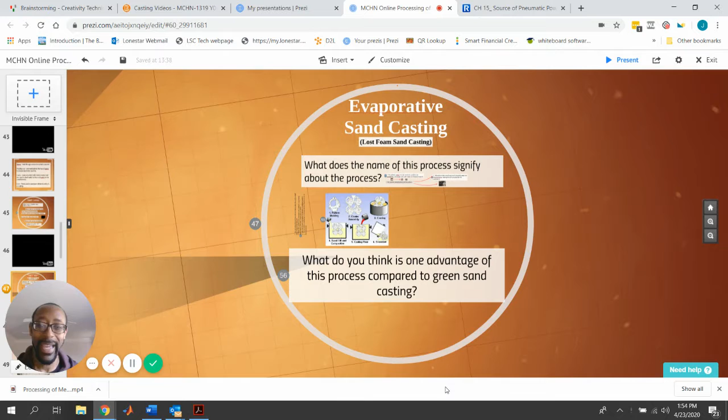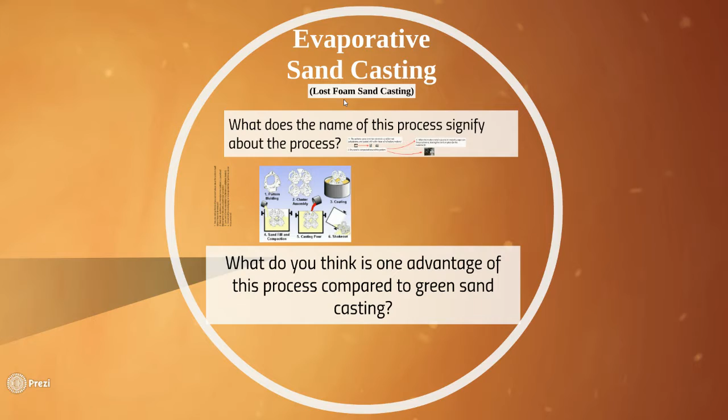We're going to move on to evaporative sand casting. Another name for evaporative sand casting is lost foam sand casting, and the reason why it's called that is because you use materials that are essentially foam and then they disappear.

So this is the way it starts out. You have a pattern. The sprue and the riser are all made up of a type of polystyrene, similar to styrofoam, formed from pellets into the pattern, and it's coated with a thin layer of refractory material, sometimes called a slurry or some type of ceramic material. This material is refractory, meaning it helps hold up against very high temperatures.

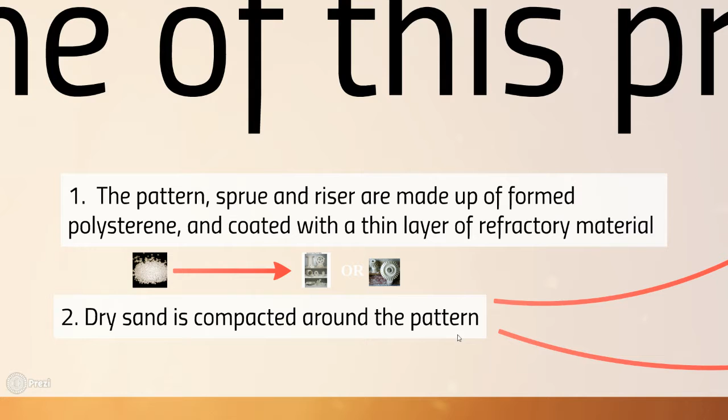The next step is that you pack dry sand around that pattern. So there are the polystyrene pellets that are formed into the pattern.

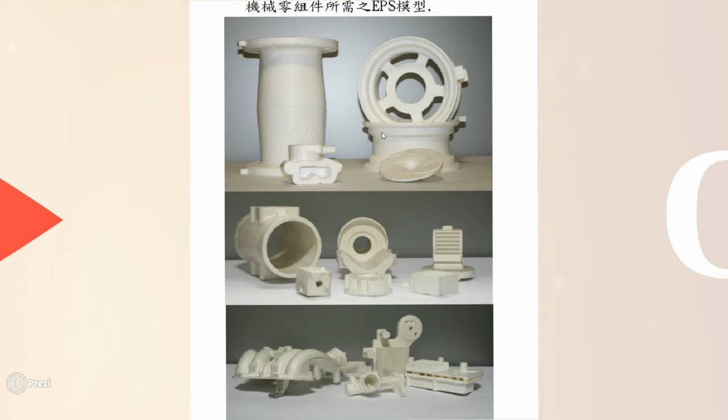Here you can see some examples of common products. It looks like a wheel rim. This is an impeller, like I told you before, from a pump. And then you have another manifold, possibly from a car. Here are examples maybe of gears, patterns for gears.

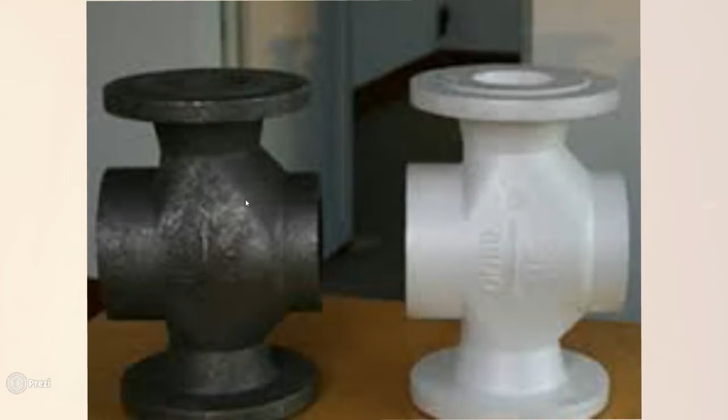What happens next is that molten metal is poured in, and the polystyrene pattern instantly vaporizes, instantly turns into a gas, and that leaves a cavity in place, which is what the metal fills. So you can see how closely the pattern represents the final product.

Here's another diagram of the basic process of evaporative sand casting or lost foam sand casting. You start with a pattern, and oftentimes in very high throughput processing you have what's called a cluster assembly, or tree assembly, in which several patterns are all put together in one group. Then you coat it with the refractory material, and you put it in a box and support it with sand.

The next thing you do is you pour in your molten metal, and as the molten metal hits that polystyrene pattern, it instantly disappears, or volatilizes, turns into gas, and then your molten metal cools into the area that's left over.

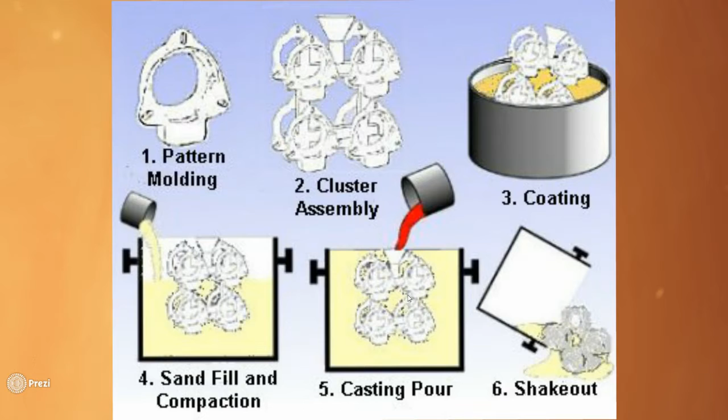So what do you think is one advantage this process has compared to green sand casting? Keep in mind that in this case, you don't have to remove the pattern because the pattern disappears, it volatilizes. So what does that mean?

Well, first of all, you can cast patterns of any different size and shape, because the pattern doesn't have to be removed, so you don't have to worry about a draft. You don't have to worry about how you're going to get this pattern out of the mold, because it instantly volatilizes. Now, mold shift problems, which are a big problem in sand casting, particularly green sand casting, are eliminated because mold shift occurs when you're removing the pattern or putting the pattern in. This doesn't have to happen anymore, so you don't have to worry about mold shift.

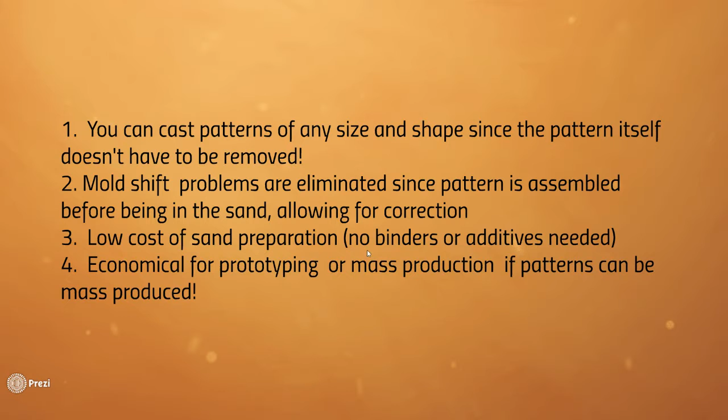It's very low cost to prepare the sand. You don't need any binders or additives. And this is economical for prototyping or for mass production.

Our next type of casting process is called shell process sand casting. This process is actually interesting because it can be considered a semi-permanent mold casting process. So what happens? Well, a permanent metal pattern is used and it's heated.

That pattern is coated with a release agent to make sure that any sand that dumps on it can actually be released from it. Then you turn it upside down in this big box and allow that sand to fall on it, and then that sand sticks to it and hardens.

After a certain amount of time, the dump box is turned back over again, and then the layer that has formed to the pattern comes off, and it looks like a shell. So you have essentially half a shell.

So you do that one more time. You put the two halves together, and then you have a whole shell. You put that in a box with some sand around supporting it, and then pour your metal down in between the two. So this is kind of what it looks like.

Here's a diagram. You have your big dump box, okay? You have your sand at the bottom. Now here's your metal pattern right here. You invert the dump box, turn it upside down, and then all that sand falls on the heated metal pattern.

Because the metal pattern is heated, it starts to solidify the sand in a small layer right here. You turn the dump box over again, and you still have that layer of sand, that shell. Then you remove the shell, create another shell, and you have two halves, and then you support that with sand, and pour your molten metal in between here and allow it to solidify.

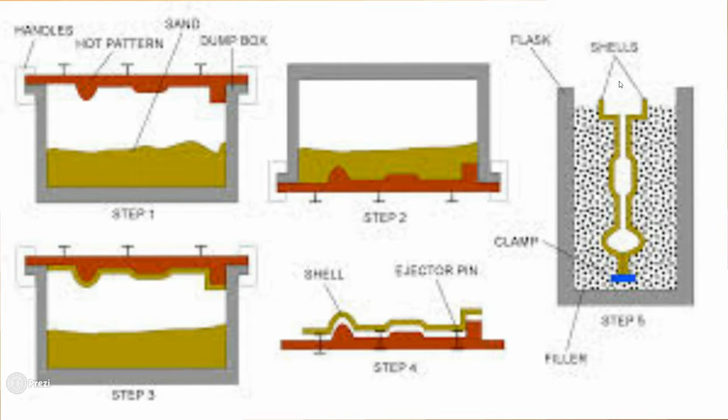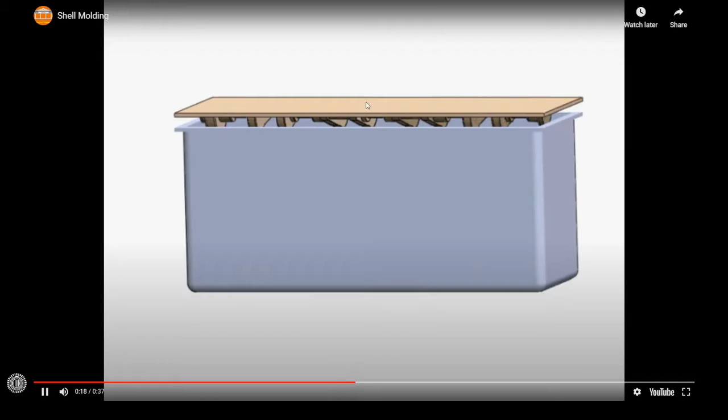So here's a quick illustration of the shell molding process, shell process casting. It's called shell molding or shell process casting. So you see the dump box turned back over again. Here's the metal pattern. Here's the shell that was created. Okay, so now you have two of those shells, and you dump the sand behind it, and then you pour the molten metal in there.

Now, the only thing that is wrong about this is that it looks like you just completely get rid of the shell, which does not happen. It doesn't show you the shell here, but that is what happens. The shell continues to stay around.

Now here is another video discussing shell process sand casting. Let me start that one over again.

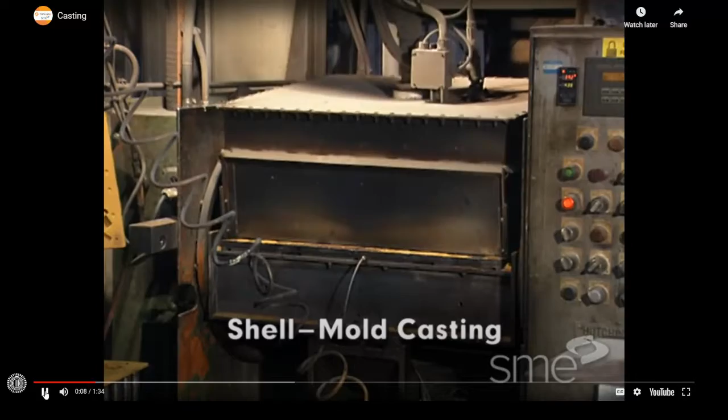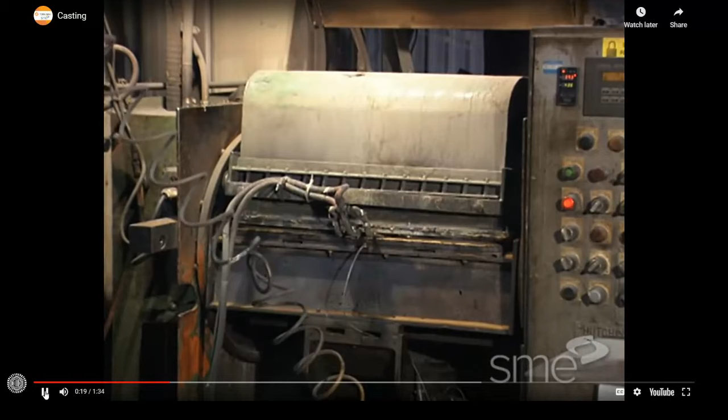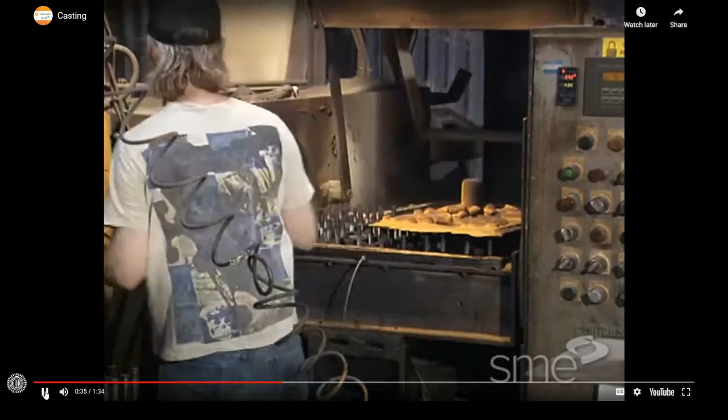Shell molds for sand casting are produced by heating a metal pattern and then rotating it upside down. This exposes the pattern to a mixture of fine silica sand and a resin binder, setting a layer of the mixture to the heated surface of the pattern. To complete the curing process, the coated pattern is covered and baked. Once cured, the hardened shells are removed from the pattern and serve as mold halves.

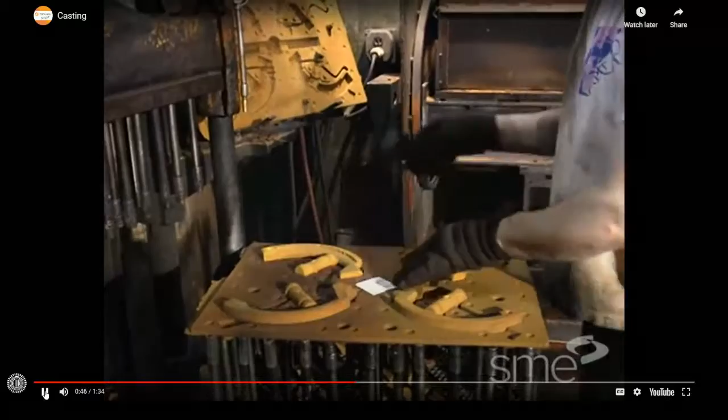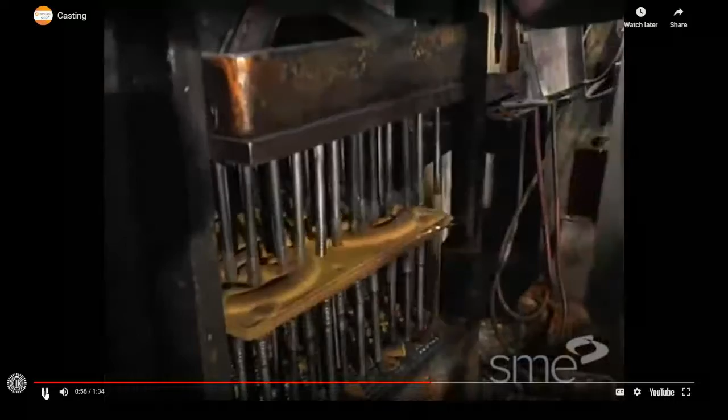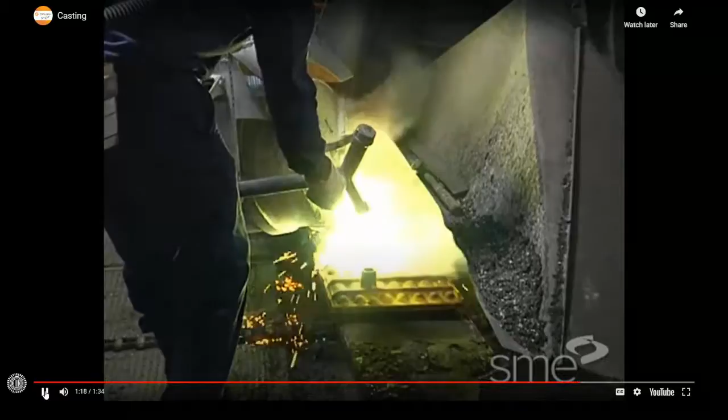Shell cores, which are produced similarly, are placed within the drag side of the mold. A bonding adhesive is then applied, and the cope side of the mold is aligned and secured, creating the finished shell mold. These shell molds can be produced quickly and store well for extended periods of time. Shell mold casting is a semi-precision process, permitting more intricate shapes, closer tolerances, and smoother finishes than using green or no-bake molds. The size of parts that can be cast in shell molds is limited, however, with most castings weighing less than 45 kilograms.

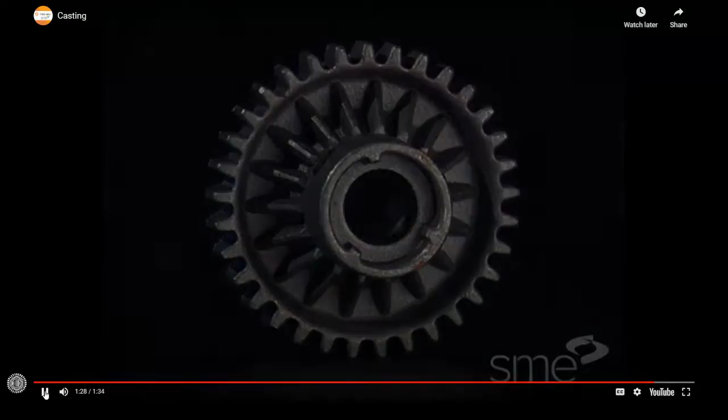All right, so what are the advantages and disadvantages of the shell process casting process? Well, this process has advantages in that it gives you finer detail and a smoother finish. And the reason why it does that is because the sand is finer, and it also makes a smoother mold surface.

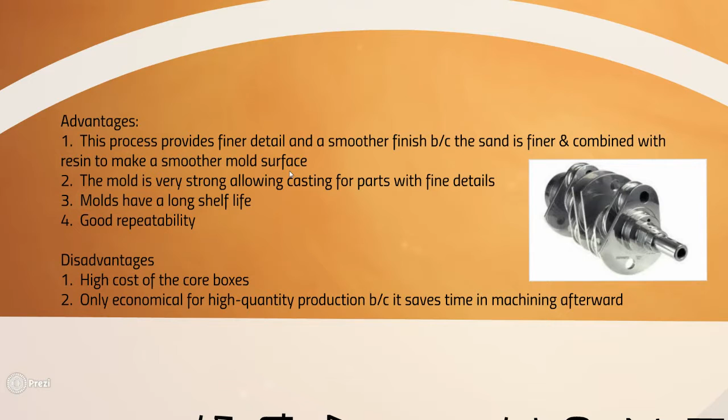Now, part of that is also because you have a semi-permanent mold. So semi-permanent molds and even permanent molds, the more permanent it is, will give you a finer, smoother surface with higher dimensional accuracy. Now, number two, the mold is very strong, okay, allowing the casting of parts with fine details. The molds have a long shelf life. That's why it's semi-permanent. It isn't just one use.

And then it also gives you good repeatability. So you're able to repeat products of the same dimensions with this process.

Now, what are the disadvantages? Mainly that it costs a lot. Okay, these core boxes or dump boxes cost quite a bit. And because of that cost, purely because of that cost, these are only economical for high quantity production.

Also, you have a little bit of savings on machining afterwards because of its superior material properties - it's finer and has higher dimensional accuracy. But in the end, it has a very high cost, which only makes it economical for high quantity production.

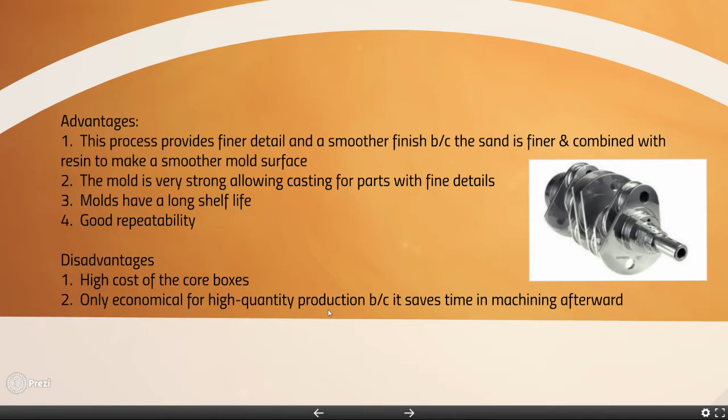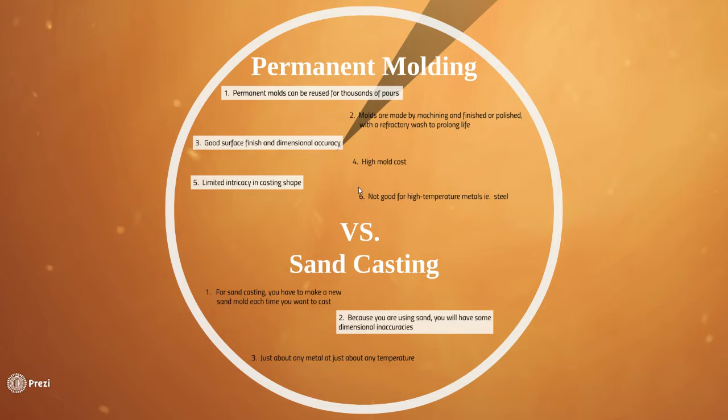All right, now let's look a little bit closer at permanent molding versus non-permanent molding, which we'll call sand casting. And of course, you have the shell process kind of in the middle because that is a semi-permanent molding casting process.

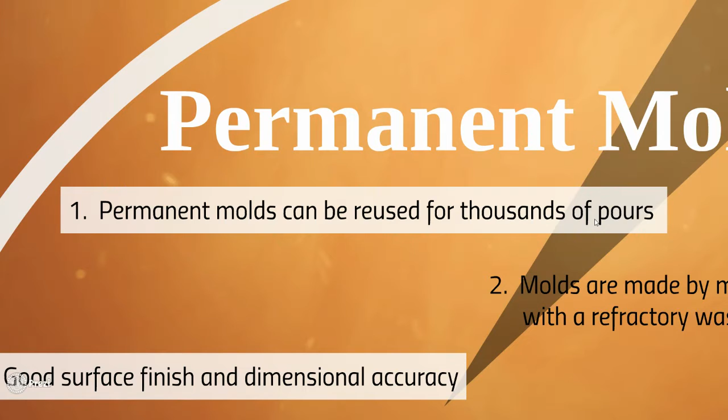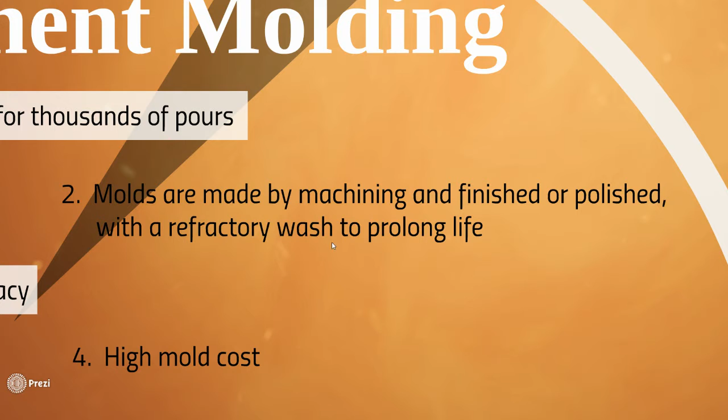So first, how can we describe permanent molding? Permanent molds can be used and reused and reused, so that is an advantage. But these molds are made by machining, they're finished and polished, and then they have refractory typically added to prolong life. We haven't talked about specific permanent molding casting processes yet, but we will directly after this. They also give a good surface finish and very high dimensional accuracy because it is a permanent mold.

All right, let's look at number four. Because it is a permanent mold, it has a very high mold cost. You can remember from part one that green sand casting was very cheap. Well, permanent molds have a very high cost to make and very high cost to maintain.

Also, you can have limited intricacy in casting shape for permanent molds because they're based upon the shape of the mold you can make. They're also not good for high temperature metals. Why? Because the heat from high melting temperature metals can damage the permanent mold, and once it's damaged, you have to create another one.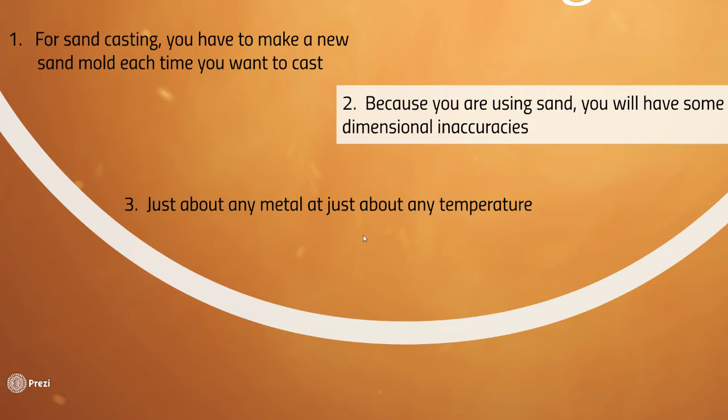For number three, just about any metal at just about any temperature - that's definitely an advantage because of the refractory properties of sand. The melting temperature of the metal doesn't really matter that much, it's not going to hurt the sand. That's why you can cast any metal at just about any temperature.

Okay, so our first permanent mold casting process is called centrifugal casting. Here's how it works: molten metal is poured into a rapidly revolving mold. Obviously this is going to be for molds that are cylindrical or circular in shape because it's rapidly revolving. Then, due to centrifugal forces, the metal is going to conform to the shape of the mold.

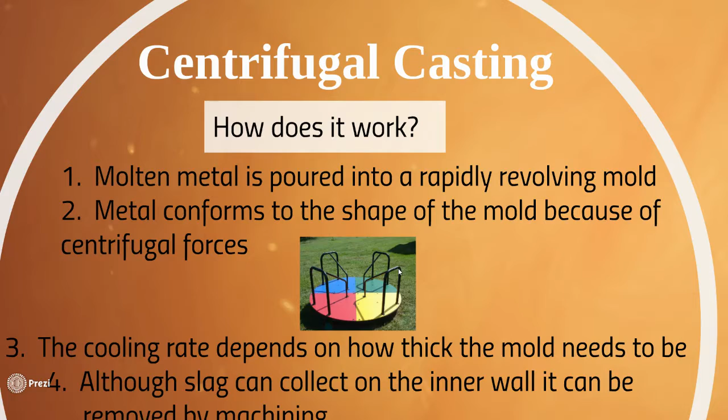Think of something like a merry-go-round. Someone stands in the middle, someone stands on the side, and they go ahead and swing you around. As this thing keeps spinning faster and faster, you can feel yourself being kind of pulled off of it. That centrifugal force is pulling you off of it, and the same thing occurs in centrifugal casting.

Other things to think about: your cooling rate depends on how thick the mold needs to be, so both of those are intertwined. Slag, which is a certain amount of impurities, can collect on the inner wall and be removed by machining. This is actually an advantage because all those impurities can be removed at once, giving you a very pure casting. This can be done horizontally or vertically, whether you want to produce wheels, drums, barrels, or pipes - of course, all cylindrical or circular products.

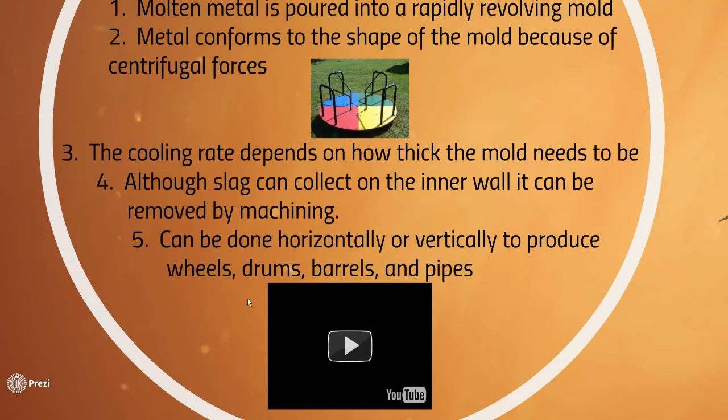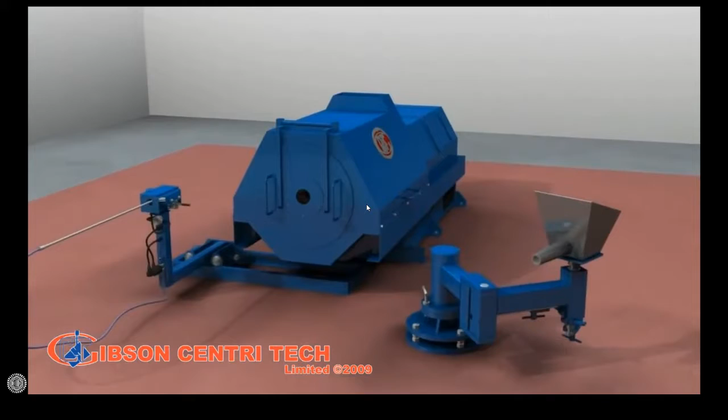So here's an illustration of how centrifugal casting occurs. Right here is the machine that's holding your permanent mold.

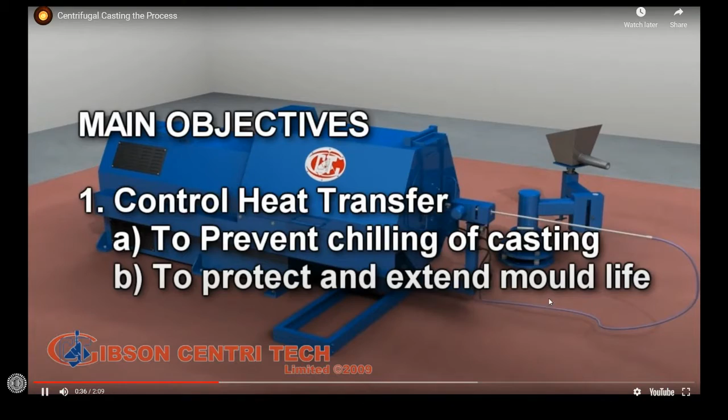Then they're going to do some things first: apply a mold coating to the inside surface of the mold. You can see it's spelled M-O-U-L-D, so it's probably a European video. The reason they're doing this is to prevent chilling and also to make sure that the mold solidifies evenly.

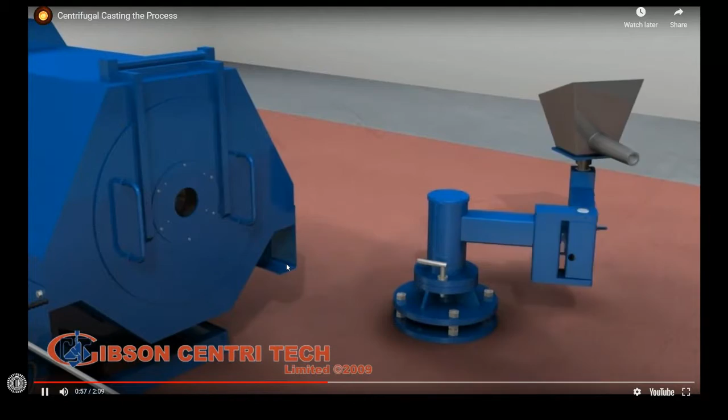Now you also want to provide a good surface finish, and this enables easy extraction of the mold. Next, you're going to pour in that liquid metal, the molten metal.

Metal goes in as your mold is spinning. So the molten metal is subjected to 80 to 120 times the force of gravity. That's the centrifugal force we are talking about.

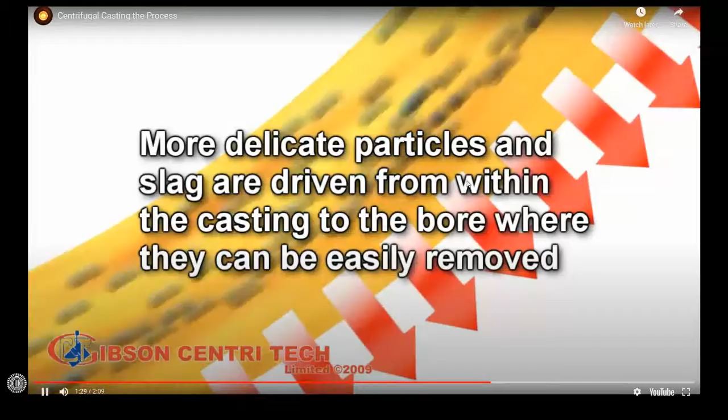Solidification takes place from the outer wall to the inner wall. Because of that centrifugal process, the heavier or more dense materials go to the outside - that's the metal. The less dense material is the slag.

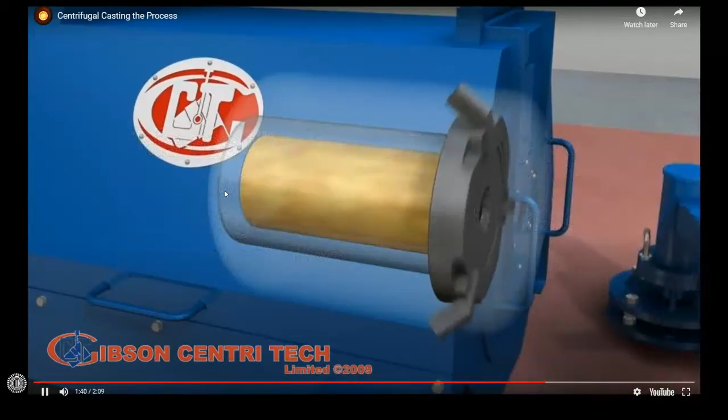So you machine that off, and this gives you a very pure metal structure. The advantage is a very pure structure, which gives you better mechanical properties. You don't have to machine off any ingates or feeders or anything like that.

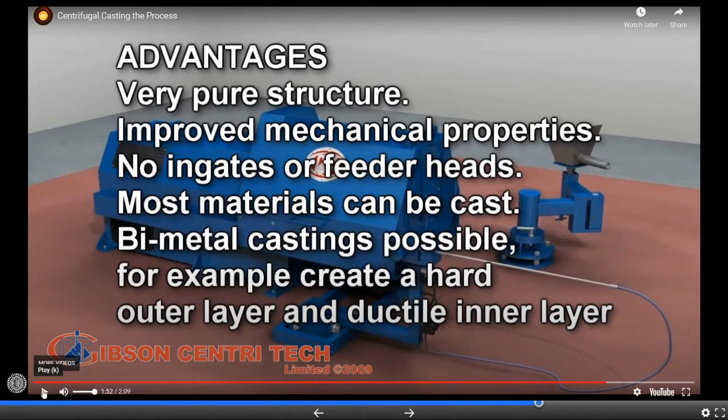Plus, you can do bimetal castings by having one metal that is less dense than the other metal. Applications of this would be if you want a hard outer layer and a more ductile inner layer - a layer with a little bit more flexibility. Now, our next process is called investment casting.

Investment casting is a little unique from some of the other casting processes we're talking about so far. It is not a permanent mold casting process, but the reason we talk about it in this section is because it gives you the high dimensional accuracy and other properties that a permanent mold will give you.

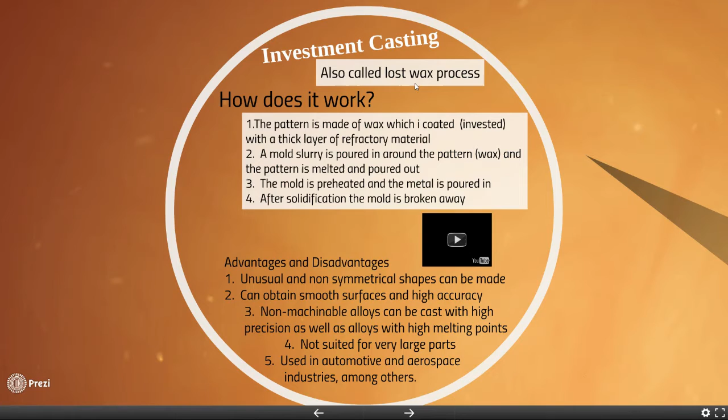This is also called the lost wax process. Remember we had evaporative casting called the lost foam process. So obviously what will happen in this case is that you'll be using wax and then the wax is going to go away. So exactly how does it work?

Well, you initially have a pattern that is made of wax, and that is typically done by a die casting process - so plastic injection molding, which is a die casting process. And then you coat it or invest it. That's why it's called investment casting, because that coating process is called investing.

You coat it or invest it with a thick layer of refractory material. Remember that refractory material is material that protects it from very, very high temperatures, usually a kind of slurry with some ceramic as part of it. This mold slurry is poured in around the pattern, and the pattern is melted and poured out. That's where the lost wax comes from - the wax pattern gets fired, melted, and poured out, leaving that open mold cavity.

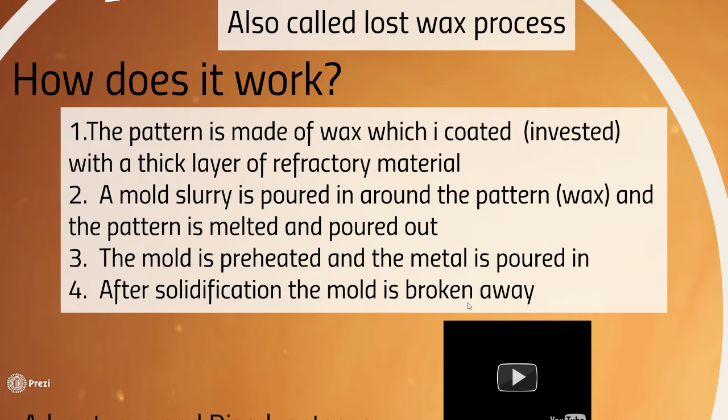The mold is then preheated, and the metal is poured in. The mold is preheated very importantly because you don't want the molten metal heating that mold at different rates in different places, because it's going to damage the mold. So you want the mold to be somewhat the same temperature, or close to the same temperature, as the molten metal. Then after it solidifies, you just break the mold away - that's why it's not a permanent mold process.

Now let's start in the middle. Let's start this at the beginning.

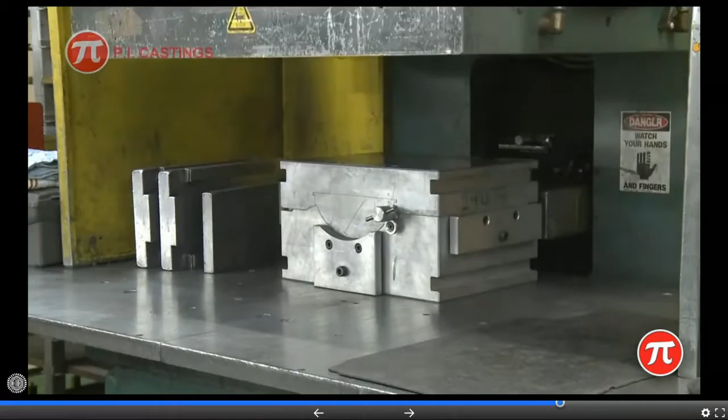The first stage of the process is to produce an exact replica or pattern of the required casting. This is made by injecting wax into a die.

The wax pattern is then assembled onto a wax feeder system. Each assembly, or tree, may have just one large pattern or many small patterns.

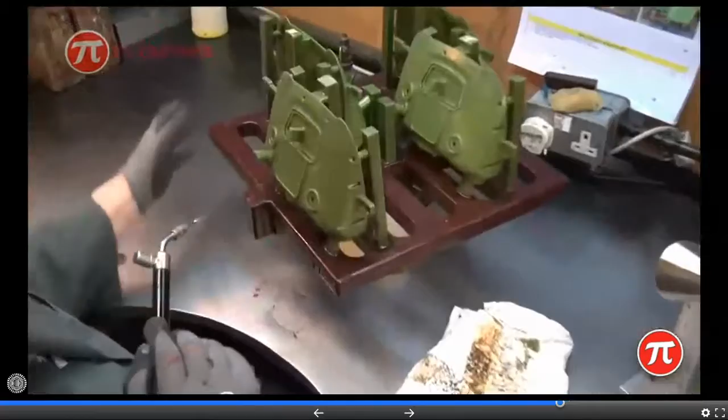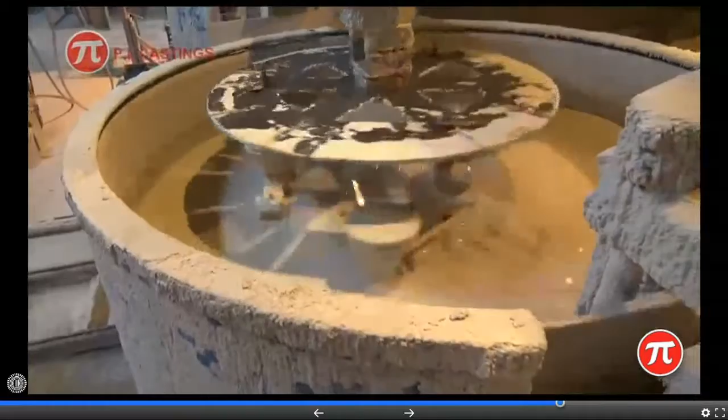The wax assembly is then dipped into high-grade ceramic slurry by a large robot. This is the most important coating, as the metal will lie next to it when poured into the mold.

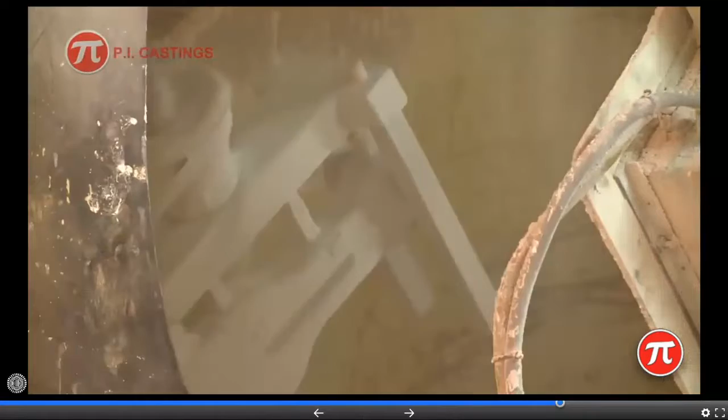Whilst the thin slurry coating is still wet, larger particles of ceramic are dropped onto the wet surface to build a thicker coat. After drying, this coating process, or investment process, is repeated several times, building a shell mold thickness appropriate to the size of casting and metal to be cast.

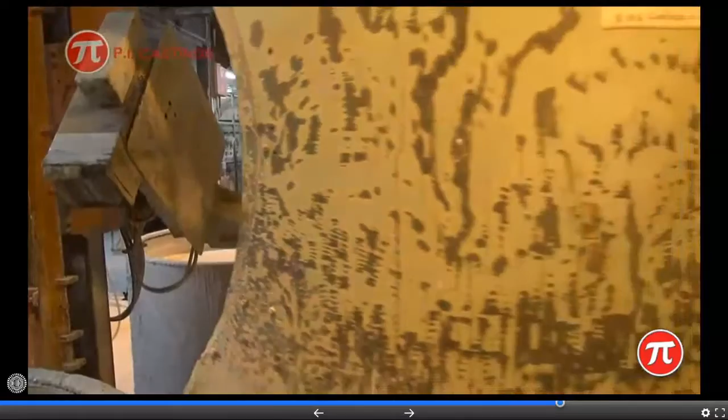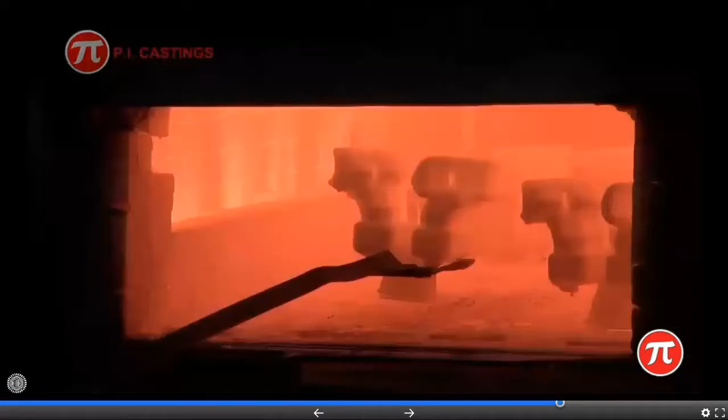After the finished shell mold is dried, the wax is melted out in a steam autoclave, hence the name lost wax process. The molds are fired at over 1000 degrees centigrade to remove any remaining wax and to strengthen the mold.

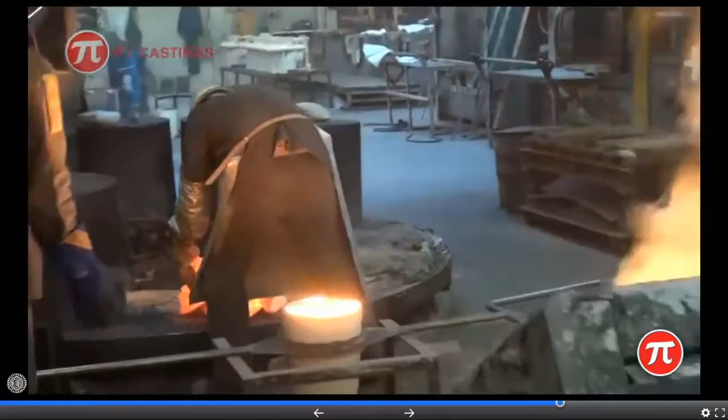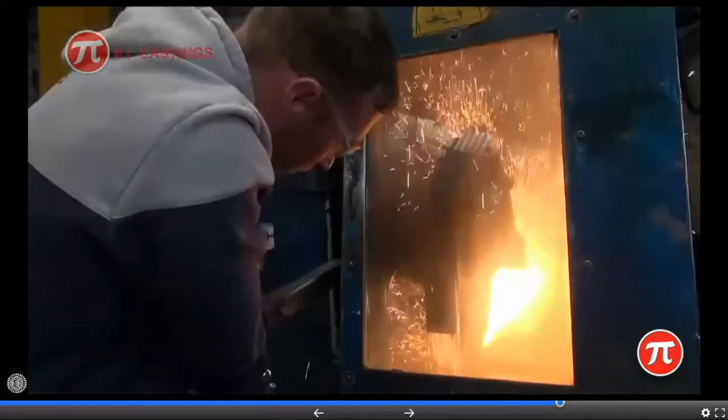Molten metal is then poured into the molds whilst they are still hot, enabling the metal to run into thin wall sections. After cooling, the ceramic shell mold is broken away, and each casting is cut away from the feeder system.

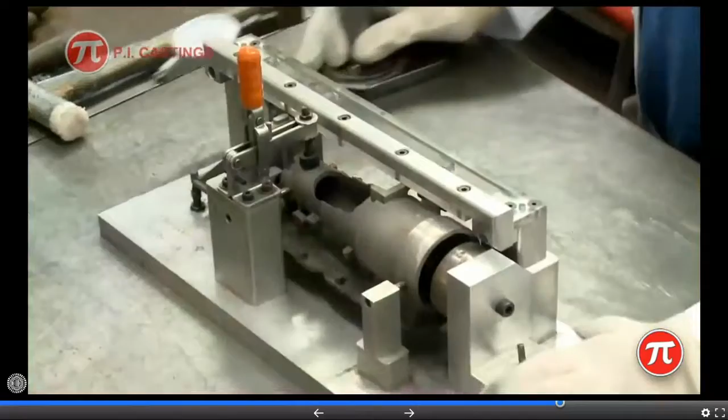The castings are carefully fettled, blasted, and heat treated. A setting operation may also be required. Material testing, X-ray, or machining can be done as part of all the post-processing after the casting process.

So let's move on and look at some of the advantages and disadvantages of the lost wax process, or investment casting. Advantages: unusual and non-symmetrical shapes can be made. It can obtain very smooth surfaces and high accuracy, and it can do this for non-machinable alloys.

Now, what I mean by non-machinable alloys is alloys that are very hard, so they're difficult to machine. These can be cast with high precision. It can also do alloys with high melting points. Usually non-machinable alloys are alloys of high melting points, but it can do both with high precision. That's very good for investment casting.

Now, investment casting is not suited for very large parts, so you won't find huge parts that are investment cast, but you will find a lot of these parts used in the automotive industry, aerospace industry, any industry with high performance that needs parts with very tight tolerances, and also needs parts which are very strong, meaning they'll be non-machinable or have high melting temperatures.

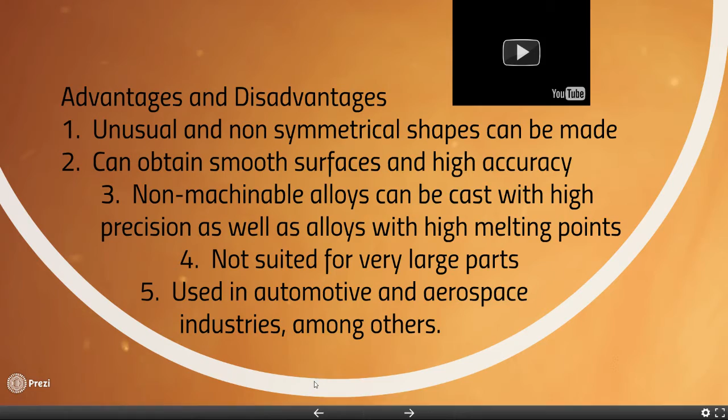The next type of permanent mold casting process we'll talk about is called slush casting. Slush casting is not a very precise method of casting, and it's used primarily for ornamental or decorative objects as well as for toys. You have thin walls in what you're making.

Essentially, molten metal is poured into the mold, and then you let it stay there, but you don't let the mold completely solidify. You turn it upside down, and what's left over is just a little layer inside the mold cavity.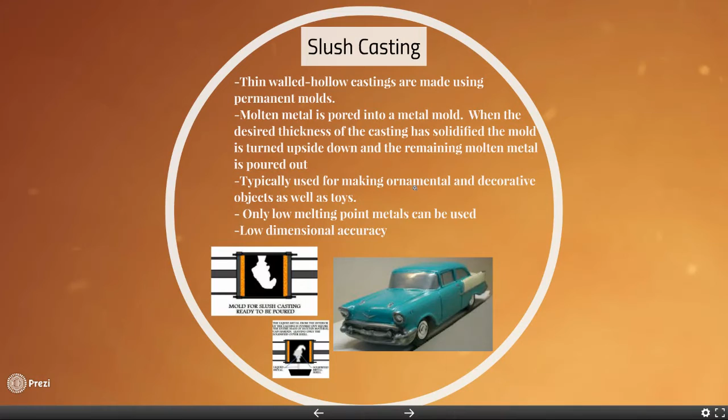Only low melting point metals can be used for this, and it does have very low dimensional accuracy. So, as I said before, it's used primarily for ornamental and decorative objects, also toys.

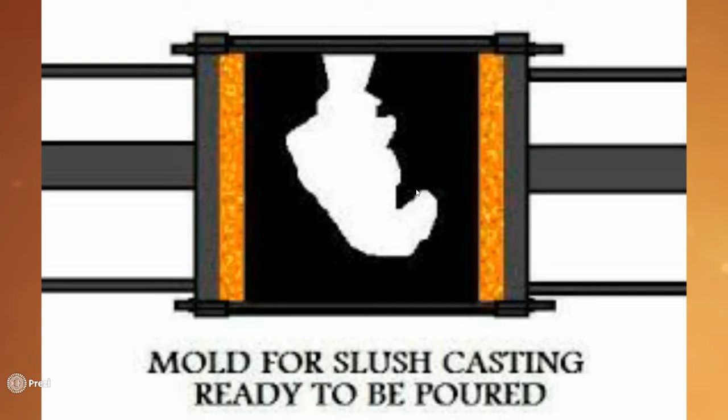Here's that process: this would be an example of a mold, and then you'll go ahead and pour the molten metal into that mold, but you don't let it solidify all the way, just enough so that there's a layer that's solid. Then you turn it back over, letting all the rest of the liquid metal stream out.

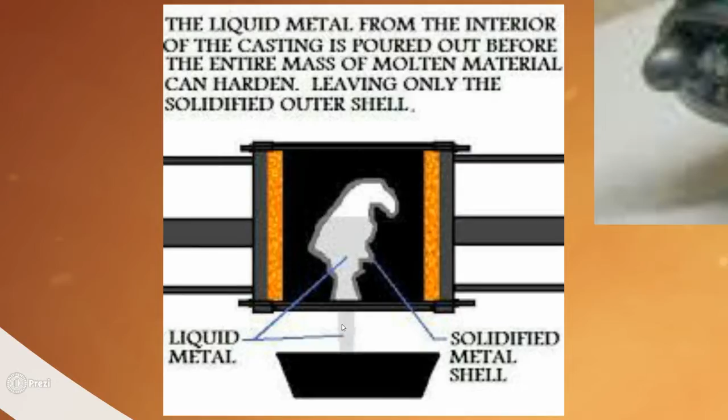Our next casting process is called die casting. Die casting is another permanent mold process. What occurs in die casting is you have a mold with two halves.

Typically, the mold is made up of some type of very strong and hard metal. The reason why these molds need to be so strong is because they're injected under extremely high pressures, from 1,000 to 100,000 pounds per square inch.

Other characteristics are you have grooves in them to permit gas to escape, because that is very important. The gateways to the actual mold cavity are trimmed off later on, in addition to the sprues and also the runner and gating system.

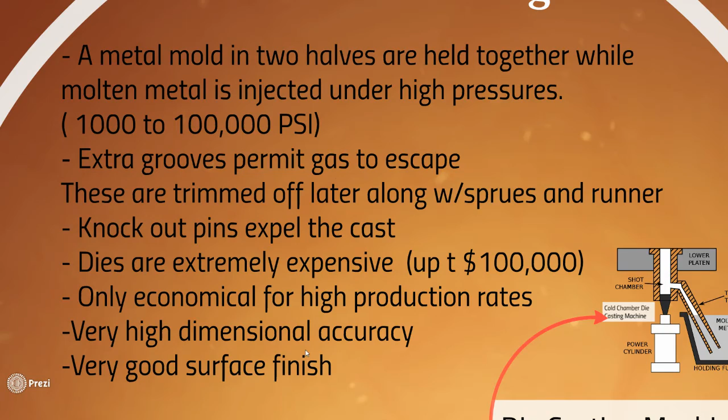Now, these dies are extremely expensive. They're usually machined out of hard metal, that's why they are so expensive, up to $100,000, I'm sure more. So this process is really only economical for mass production, only economical for high production rates. But it does give very high dimensional accuracy and very good surface finish.

Now, there are two types of die casting machines normally used. One is a cold chamber die casting machine, meaning your injector is outside of the molten metal - that's why it's called cold chamber. The reason is that the molten metal is just too hot to have the injector inside it, so it has to be outside. Usually what happens is you'll either suck or dip some metal and then pour it into your injector, and the injector will go ahead and inject it into the mold.

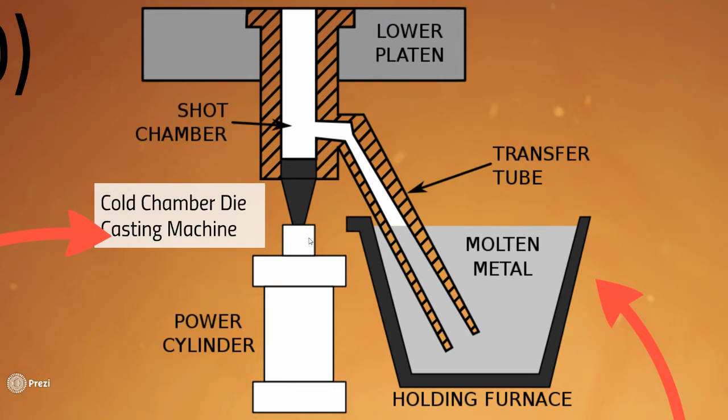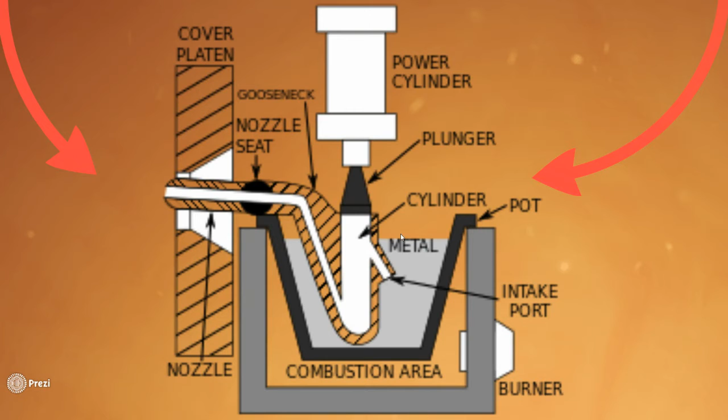And that was cold die casting. Now you also have the hot die casting machine. This is hot die casting because your injector is actually in the metal, so your injector is considered hot. Keep in mind that a hot die casting machine can only cast metals with low melting temperatures. I know that seems kind of backwards, but that's just because the nozzle is buried and embedded into the molten metal.

Now let's talk about molten metal safety for a little bit, since we haven't discussed that yet. When you think about molten metal safety, what comes to mind? One thing might be that you don't want spilling or splashing, you don't want this very hot molten metal to spill or splash on you. To keep that from happening, you'll wear protective equipment including safety glasses, face shields, hard hats, boots, gloves, leggings, and aprons.

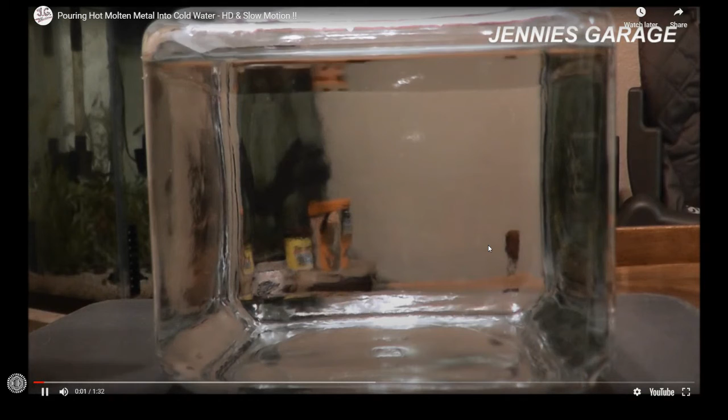Another danger is pouring molten metal into a huge vat of water. Actually, you're okay doing that. Here's an example: they're pouring molten aluminum into a large container of water. Nothing really dangerous happens, it just looks nasty.

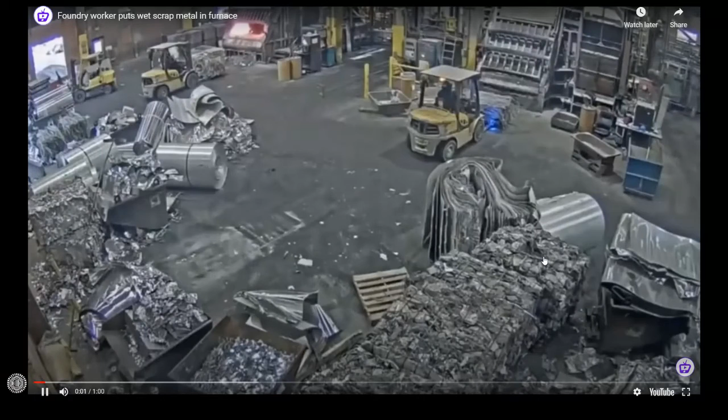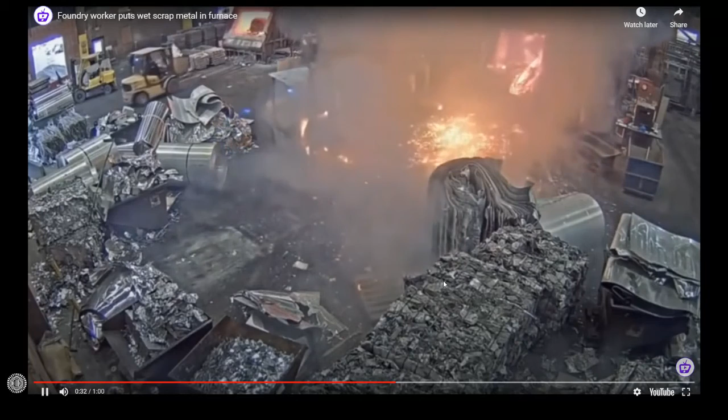Now here's an example of something that can happen if molten metal comes into contact with just a little bit of moisture or water vapor. If your mold has some water vapor still on it and molten metal comes in contact with it, you get a situation called metal pop. The water expands very quickly from the heat and causes everything to pop out, which is exactly what happened here. This guy was taking scrap metal that still had some moisture in it, and when it got heated up in the furnace, the water expanded and everything popped all over the place.

Let's think about what you consider when designing for the casting process, and some problems you sometimes run into. You consider the weight of the casting on the mold, and also its strength. You want an effective gating and a sufficient riser so all your molten metal can get where it's supposed to go, and that all your cores are placed correctly. Depending on your casting process, you also want to match the required dimensional accuracy for your part, including radius, thickness, and so on.

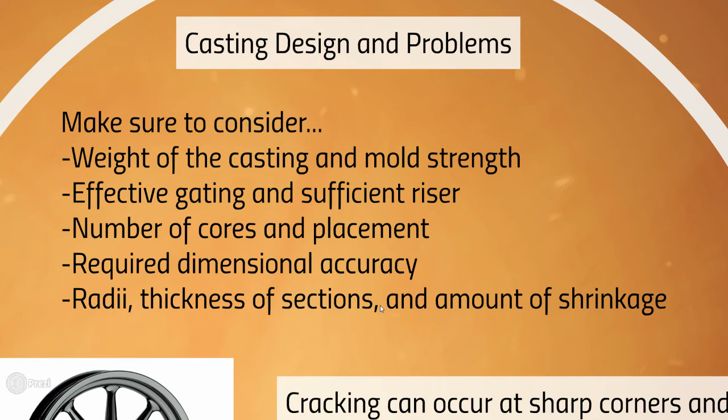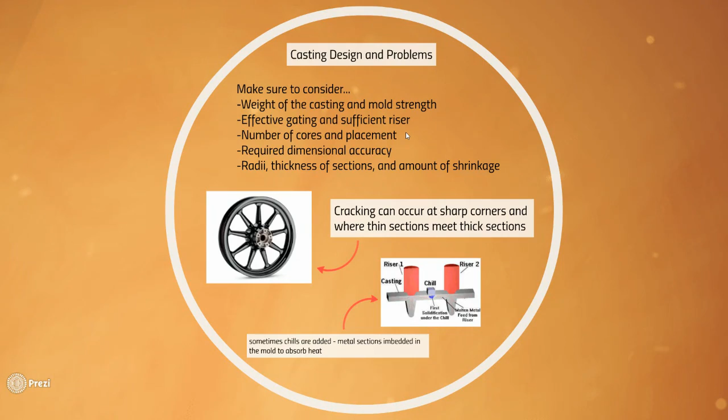And of course we cannot forget about shrinkage. Shrinkage still occurs, so you have machining allowance and also allowance for shrinkage. That means your molten metal is going to shrink down, so you need to make your pattern bigger so it can shrink down to the same size as your final product.

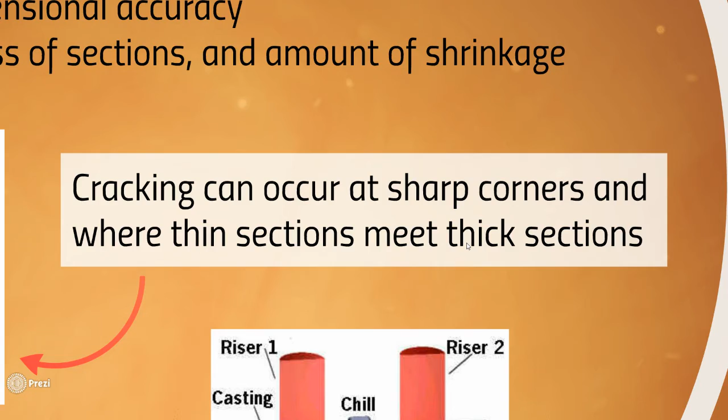Sometimes cracking can occur at sharp corners, so you'll see a lot of casting products with curves, chamfers or fillets, instead of straight corners, especially where there are thin sections. An example is this wheel right here. You see it has a curved corner instead of a straight, angled corner, and that's a result of designing for casting purposes.

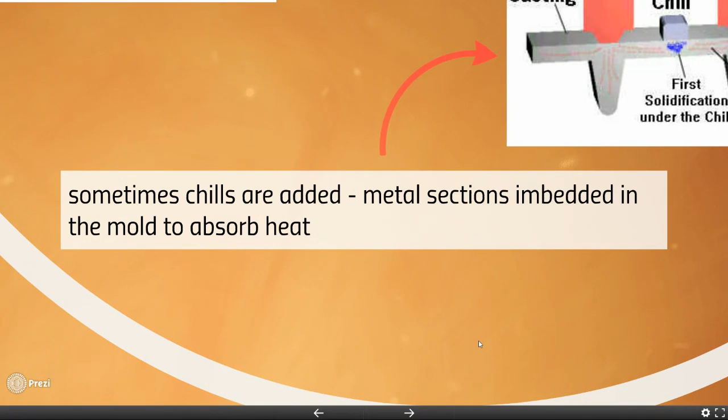Sometimes you might want to add chills. Chills are things that help you control the rate of solidification by controlling the temperature.